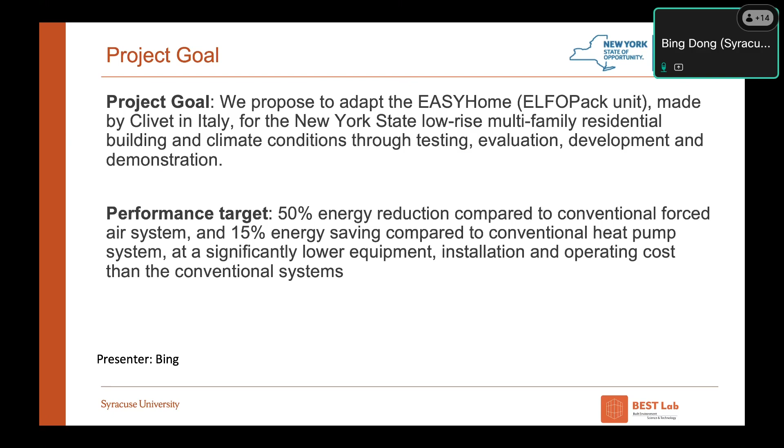So in order to do that, we first test out ELFOPack version 1.0. This system is shipped and tested in the Syracuse University BEST Lab. The idea is we will monitor through the Internet of Things, monitor people's presence in each individual home, and look at presence patterns, also the consumption patterns, so that we can do advanced controls, airflow controls for this system into different rooms.

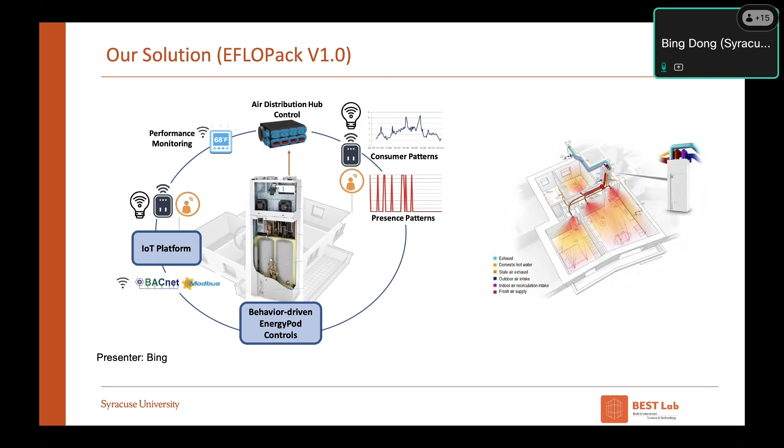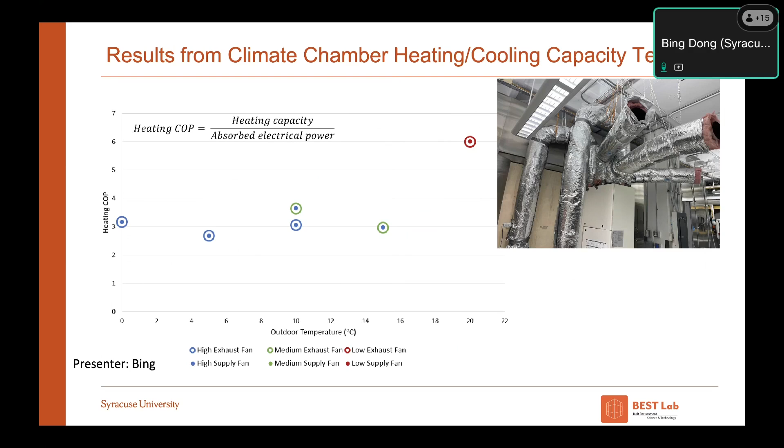And this is testing results on the BEST Lab. The BEST Lab is a 2-story home, and in this case, we modify the first floor of the BEST Lab and mimic it as a real 2-bedroom apartment in New York State climate. We install this ELFOPack 1.0 in this test home, and look at the real-time indoor temperature, energy consumption, and also indoor air quality.

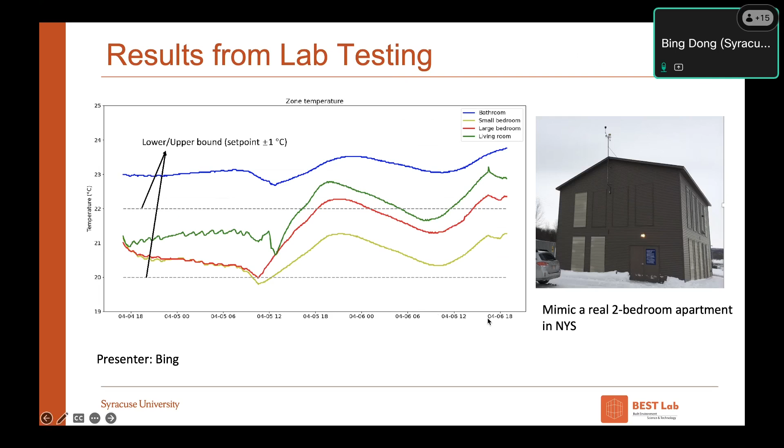Okay, now I turn this to Claudia. Based on our testing results, Clivet is developing the modified existing ELFOPack system into ELFOPack version 2 called EASYHome. Claudia, please.

Yes, hello everybody. I'm now presenting very quickly the main feature of EASYHome that also has been told is the product that we are now working on. So it is a product now on development. You see the appearance of the unit on the right and also in the table the main features of the product. So EASYHome is basically an air-to-air heat pump for air conditioning and domestic hot water production.

It is for a residential application. The capacity both in cooling and heating is about 5.5 kilowatt. The airflow goes from 400 to 1000 cubic meter per hour, and the refrigerant is R454C, that is a refrigerant with GWP lower than 150. The unit is a full inverter unit with one inverter compressor and two EC, so variable speed fans. Also on the supply side, the supply fan can provide 200 Pascal of available static pressure.

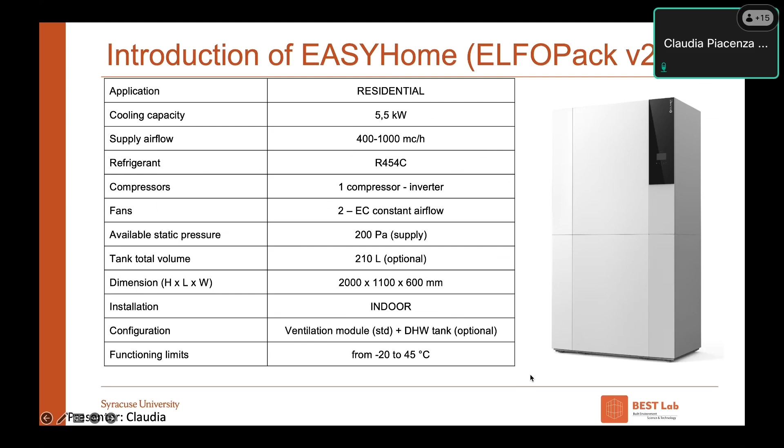The domestic hot water tank has a capacity of about 200 liters. The size of the unit is 2 meters in height, 1.1 meters in width, and 0.6 meter in depth. The installation will be indoor, and the functioning limits are from -20 up to 45 Celsius degrees.

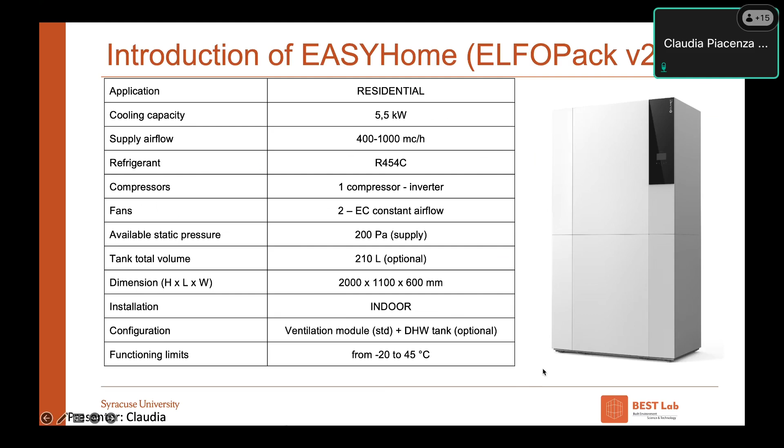If we go to the next slide, we can see the configuration of the unit. One of the main features of this new product is that the ventilation unit and the domestic hot water module can be installed separately. The domestic hot water module can be installed up to 15 meters of distance. The ventilation unit works as an air conditioner, so basically it recirculates the internal air, but at the same time a portion of fresh air can be supplied to the internal ambient to renew the internal air.

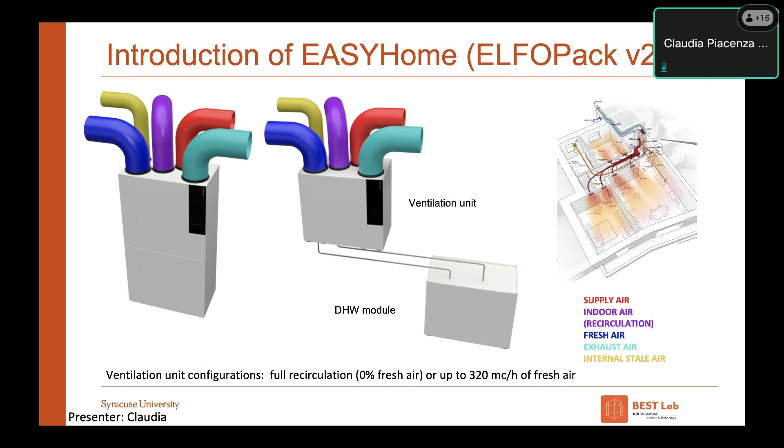For the domestic hot water module, which has about 200 liters of capacity as told before, the module will have inside both the expansion tank, the mixing valve, the safety valve, the electric heater, and the electronic anode for tank protection. There will also be the chance to have a contact to activate the heater with photovoltaic panels.

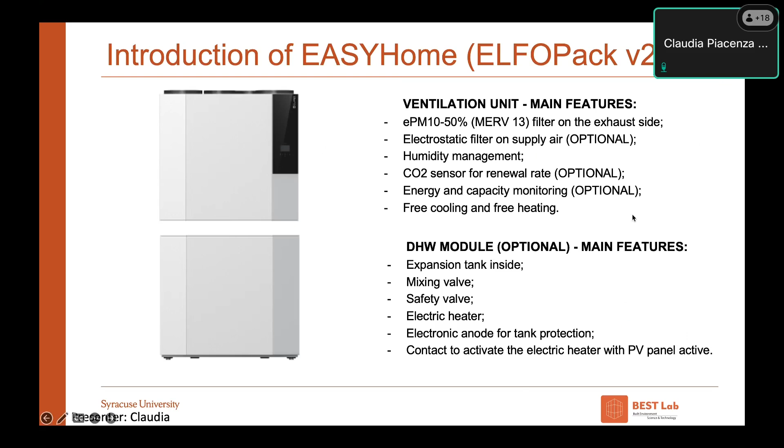In the next slide, we can see the system that Clivet will provide. Basically we will have the user interface, also called the HMI, that can be mounted on the unit or installed remotely, and it serves as the user interface. The user interface will also be connected to the app Clivet Eye, a Clivet app, and there will be the chance to connect the unit to the IoT supervisor control for energy that could be able to manage thermostats directly installed in the different rooms of the house.

The idea of this project is to retrofit an existing mid-rise apartment building with a modularized heat pump system that works as a heat pump plus domestic hot water generation. It's supposed to be 60% more efficient than a traditional package unit like rooftop units, and 40% space saving due to the modularized design. We also integrate the ELFOFresh, an innovative ERV purification system, working with an indoor fan coil unit. So this is our overall idea.

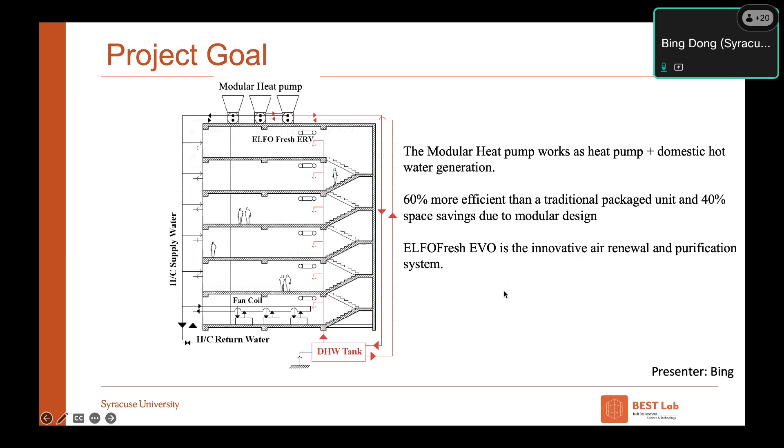This project has just started. Now I'm turning to Clivet's Trofim to introduce this product in detail. Thank you, Bing. Let me present myself. My name is Trofim, project leader in Clivet for the modular heat pump.

Let's have a quick introduction to this product. First of all, this product is already developed for the European market and widely spread in Europe. Right now, we are working on adapting it for the New York market, New York State especially. This product will be for air-to-water light commercial application with cooling capacity up to 90 kilowatts, using a sustainable refrigerant like R32.

Since the New York market requires 15 horsepower per circuit, this unit will be a double circuit, full inverter compressor up to 15 horsepower, with full inverter fans. It's for outdoor installation. The configuration for this unit can be standalone, modular, or domestic hot water production.

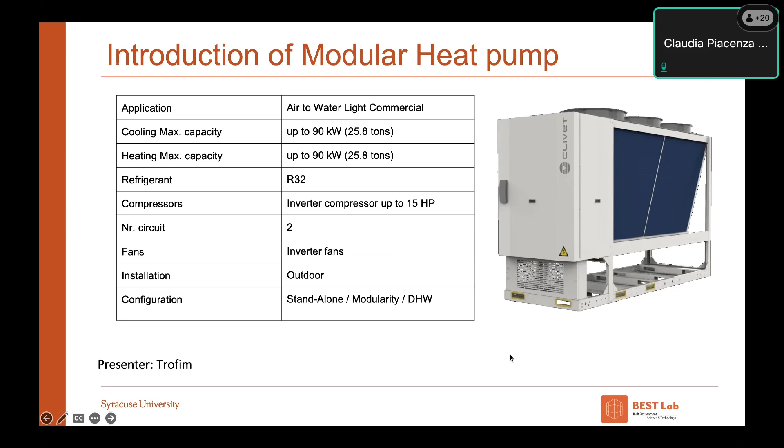In addition, there will be the possibility to have simultaneous production of heating and domestic hot water. On the next slide, we can see the main features this product will have once available on the market, which will include Modbus connection and IoT monitoring.

Then we will have several noise management features of the unit, since it can be a critical point at certain times of the day. The unit will have the possibility for scheduling, an adaptable curve for the set point, and as we said, the modularity of the whole system.

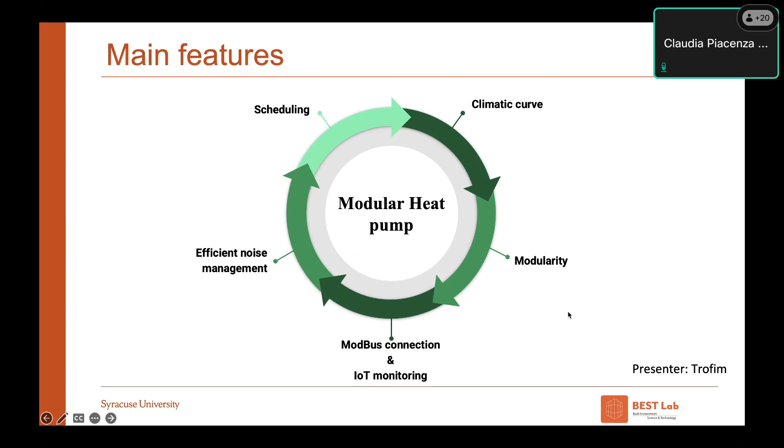On the next slides, we can have a quick look at the modularity two pipe system layout. This configuration is already available on the European market. As you can see, there is some space between the units, but in our mind the idea is to have the units together in order to reduce the necessary space for the installation.

So the system will manage up to 8 units in contemporary loading/unloading function for efficient rotation program. As we said, for space reduction, there will be the possibility to have a modular kit for fast installation and a flexible system for a redundant solution.

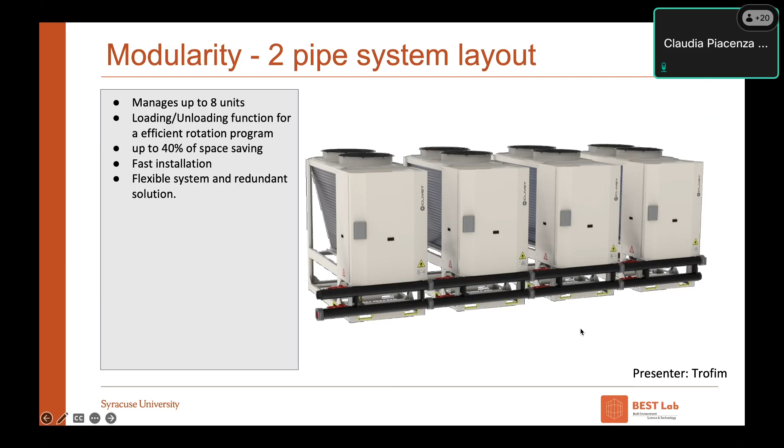Thank you, Chavi. Next, I want to specifically talk about the ELFOFresh EVO system, which is a thermodynamic heat recovery ventilation unit that will be integrated in this project too. So I pass to Claudia again.

Thank you. ELFOFresh EVO, as you see in the picture, is a thermodynamic heat recovery ventilation unit. It is a full inverter unit with both inverter compressor and inverter fans. It has a capacity up to 2.5 kilowatt and an airflow that goes from about 100 to 300 cubic meters per hour, and the refrigerant is R32.

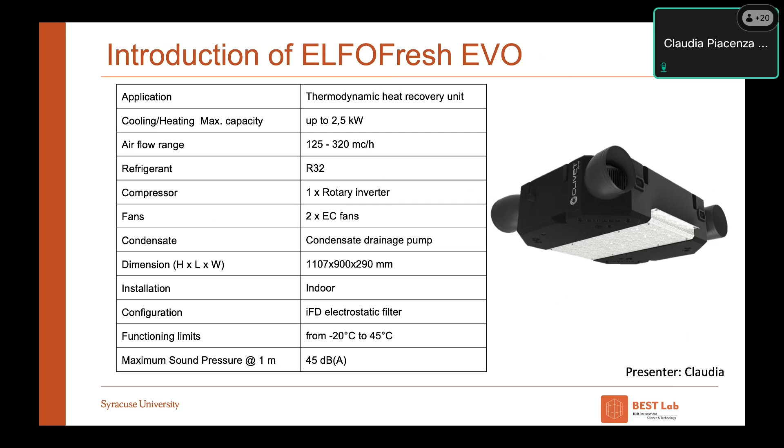It is about 0.3 meters in height and about 1 meter in width and length. It is for indoor installation. Also, for this unit, an electrostatic filter can be installed as an option, and the functioning limits go from minus 20 to 45 degrees Celsius, with a maximum sound pressure of 45 dBA. In the next slide, I think it will be more clear how the unit works.

Basically, it works with fresh air, with outside air. The outside air is supplied to the indoor ambient, and the indoor air is completely expelled. You may also notice, though it's not really clear from the picture, that the structure of this unit is in EPP material, so plastic material. This makes the unit lighter compared to a metal structure.

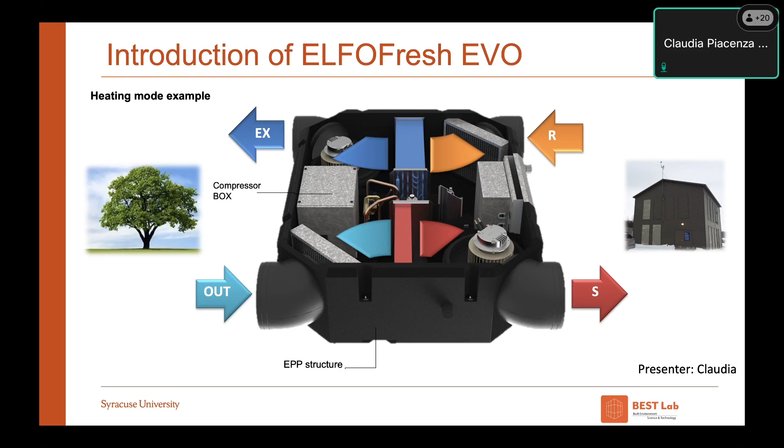In the next slide, we have some more details about the features of the unit. As said before, it can work down to minus 20 Celsius degrees. It has a structure in plastic material. The fans are constant airflow fans with 120 Pascal of available static pressure. Also, humidity can be managed on the supply side. It has a drain pump with flow switch for the condensate. The air connections shown in the previous picture are 0.2 meters in diameter, and the duct can be turned in the most convenient position. As optional, an electrostatic filter is available.